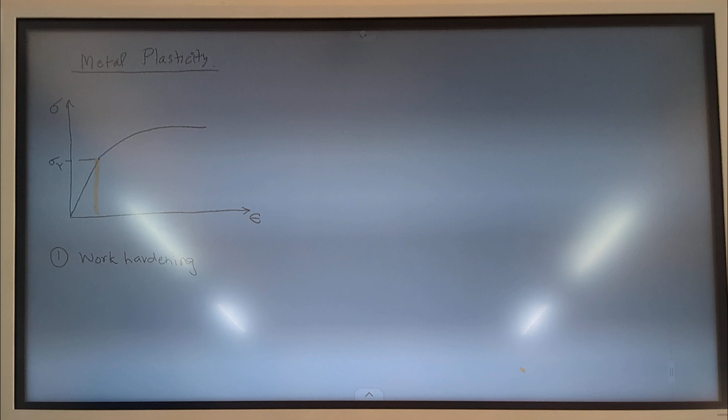So can you think of some applications where you want permanent deformation, as needed by the application? Where we don't want the material to come back after loading to its original position - we want it to become permanently deformed. So what are the applications where this is required?

You can think of many manufacturing processes which require this, which you are already studying now. Any manufacturing operation which involves drawing will involve reduction in the diameter of the wire - if you are talking about wire drawing, so various types of drawing operations.

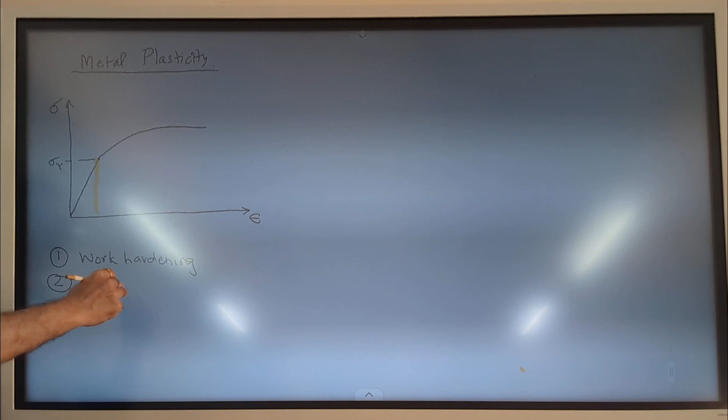What else? So I learned many manufacturing processes - hammering. Hammering is not the name of the process, that is a tool. So you can call it a forging process or bending process - that would be another process. So bending, or forming.

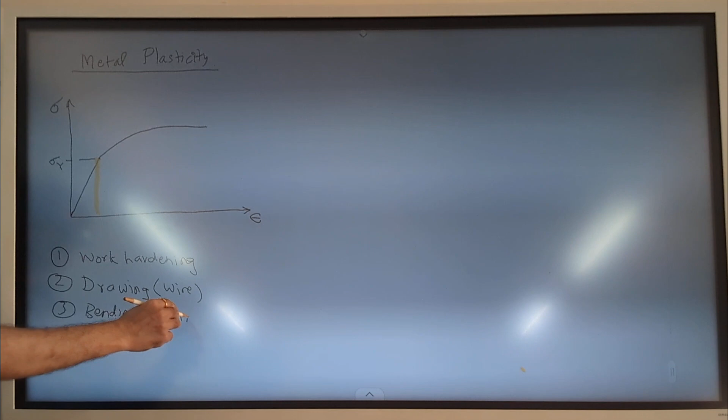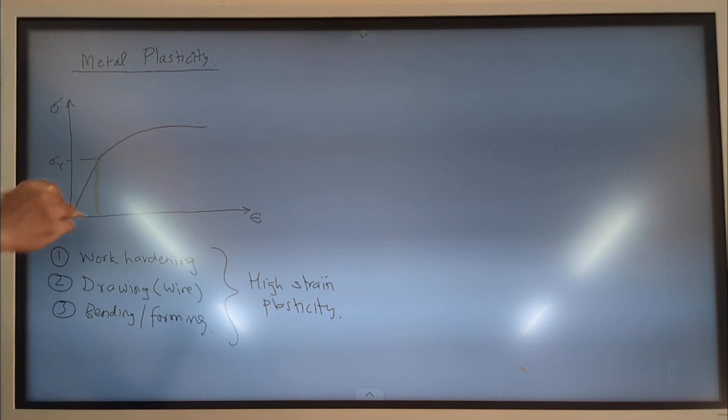These are applications where, in a rolling operation, you are making cylindrical pipes by taking a flat plate and rolling it. Those are applications where you must deform the material beyond the elastic zone. This type of application is called high strain plasticity - high strain metal plasticity, where you are operating far beyond the point where a large amount of strain is restricted. So you are not only crossing the yield zone, but going much beyond that, so the material remains permanently deformed at a large amount of deformation.

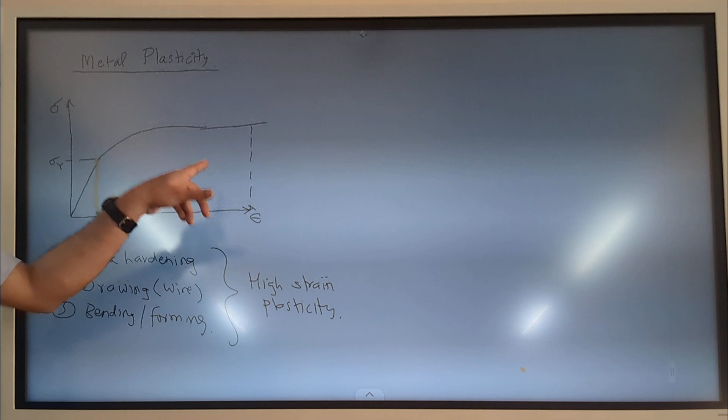So it is not a few microns of elongation that you want, but a few millimeters of elongation - that is called high strain plasticity. These applications definitely need to know what happens to the material, or how to ensure that when the material is bent, it will not crack or break. Such calculations will require the knowledge or theory of metal plasticity. Another set of applications are called low strain plasticity.

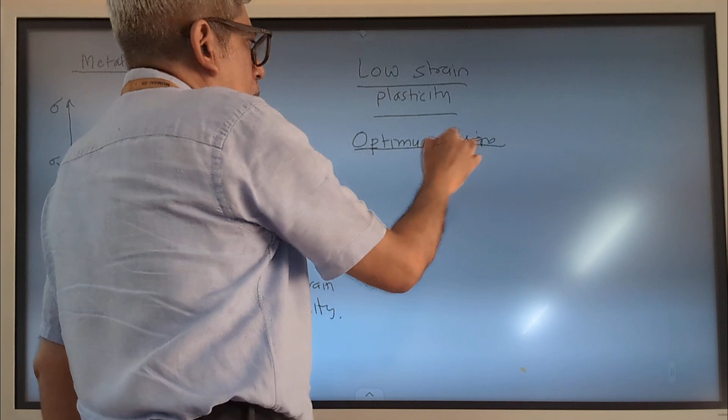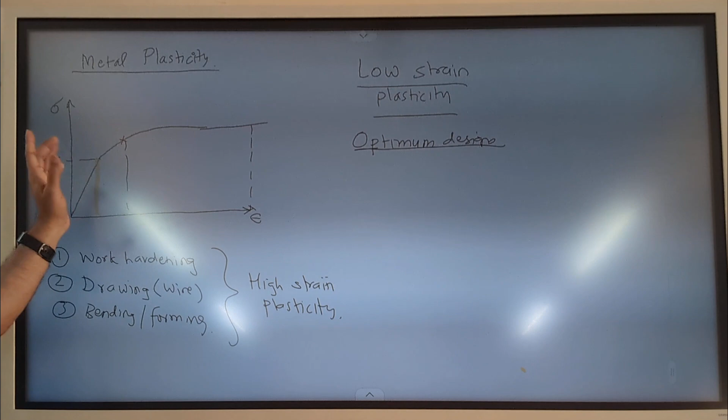They are typically used for optimum design of components, for example in aerospace industry or marine industry, where weight is a very important consideration. So you want to minimize the weight as much as possible by making the component thickness smaller and smaller. But there is a limit. If you restrict yourself up to yield strength, there is a limit up to which you can reduce the thickness, beyond which you cannot go. But if you want to reduce it further, you have to go a little beyond the yield strength, not as much as what we do here. So you cross the yield strength by a small amount and get a considerable advantage in terms of size. So these applications are mainly in aerospace or marine applications.

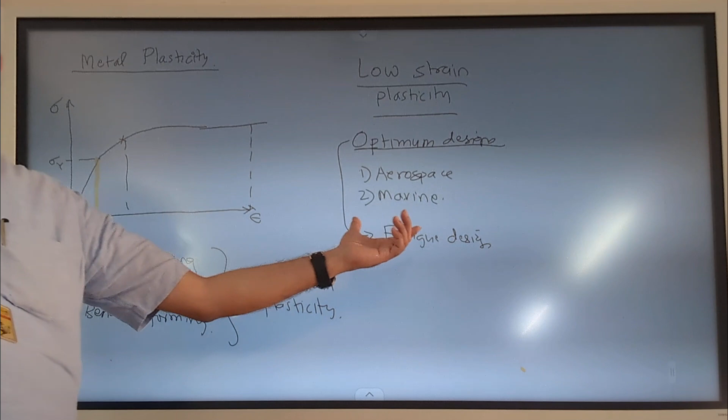This particular low strain plasticity is also very much linked to what is called fatigue design. In fatigue design, with the application of low cycle or low value strains, there is a separate theory useful for optimal design of this particular set of components. So that is the background or motivation for why we need to understand this theory of plasticity.

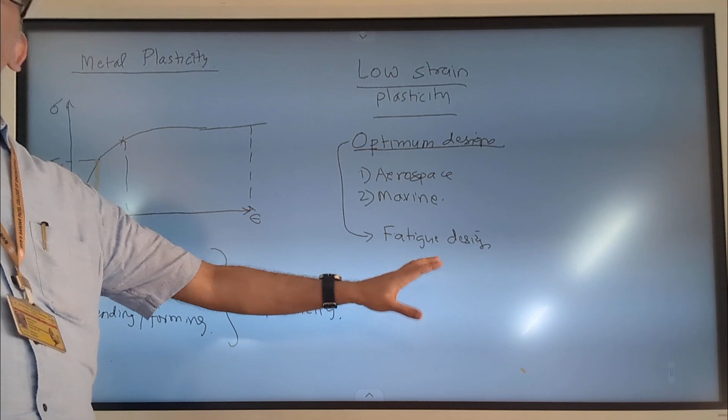Now we'll also understand some characteristics of plasticity. One thing is, as we said, that it is an irreversible process. Once the material deforms, it is permanent. You cannot get it back to the original shape. So that is an advantage and disadvantage in some applications. The second thing is it involves dissipation of energy.

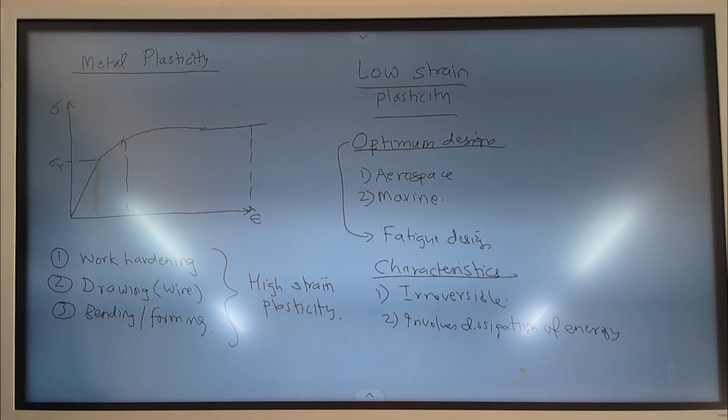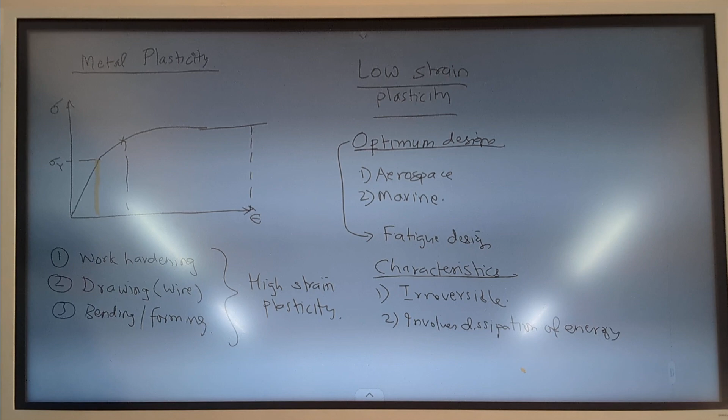I don't know whether your batch has done a physical tensile test, or whether you did it virtually. Immediately after the tensile test, if you touch the specimen, you will find that it has become hot, because while doing this plastic deformation, a lot of internal or metallurgical structures have some internal friction that has to be overcome, and a lot of work is being done internally. So part of that gets released as heat, which is why you find a temperature rise. So it involves dissipation of energy. Not all the work done during deformation gets stored as plastic work; part of it gets dissipated as heat energy. So that is another aspect.

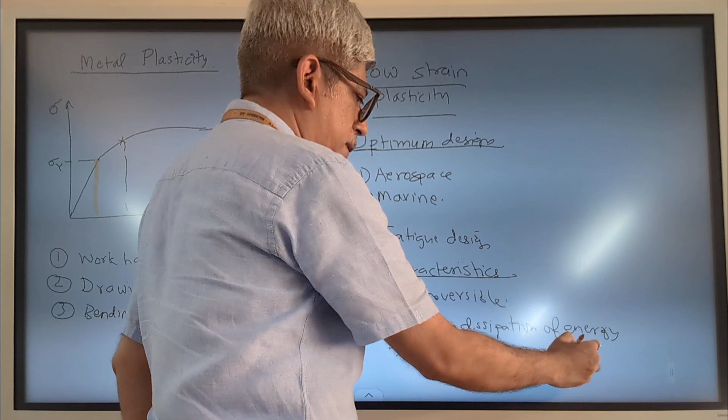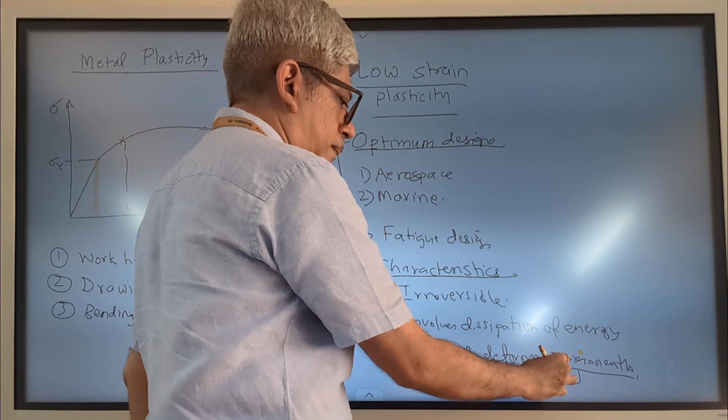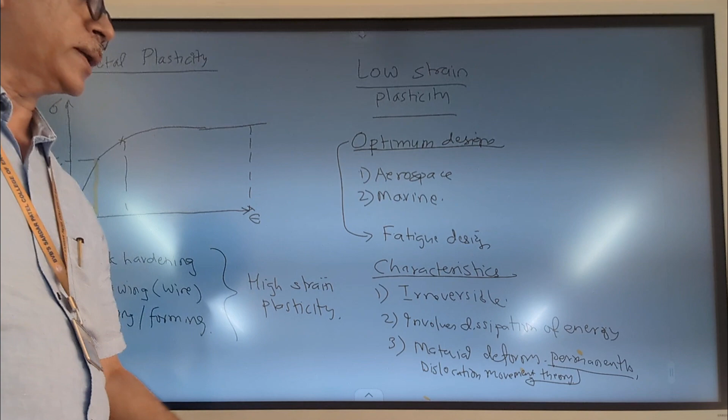One more characteristic of plastic analysis is that during this operation, the material deforms permanently, same as the first point, and you cannot get it back. This permanent deformation is explained in terms of the metallurgical processes you learn in material science. There is dislocation theory, or dislocation movement theory, which explains why the material behaves the way it does. Certain materials behave in the manner shown here. So if you want to know the physics behind how material plasticity operates, you have to take help of the material science approach, where you learn how the internal grain structure or crystal structure deforms, which leads to dislocation movement, and the permanent deformation happens because of that. So that is the background about the plasticity process.

Now we'll understand some of the terms and phenomena which are associated with metal plasticity.

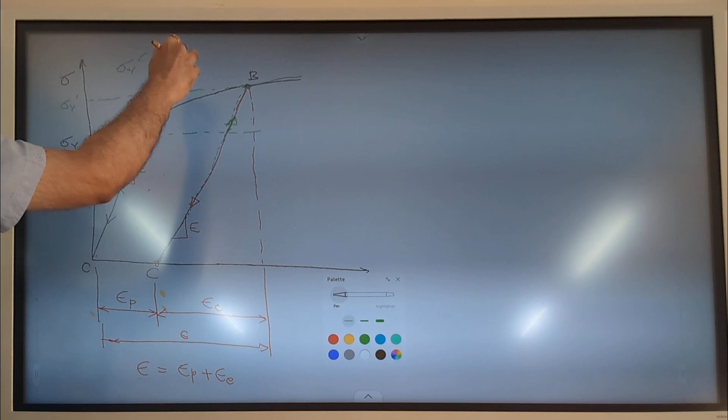So the yield point, originally sigma y, because of the one load and unload cycle, got enhanced. This new sigma y dash is greater than the original sigma y. A material which was never loaded, once it undergoes one load cycle beyond the yield strength, will show enhanced yield strength in subsequent cycles. This effect is called strain hardening or work hardening.

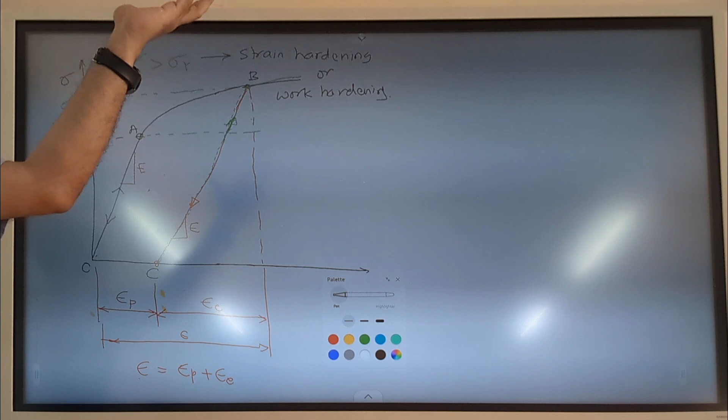So this, the definition or the process of strain hardening is that you take a component, load it beyond yield point, and again bring it back to zero load condition. In the next cycle of loading, you will find that because it has gone beyond the yield strength, its yield strength would have increased. And since in design calculations we use the yield strength as a basic property...

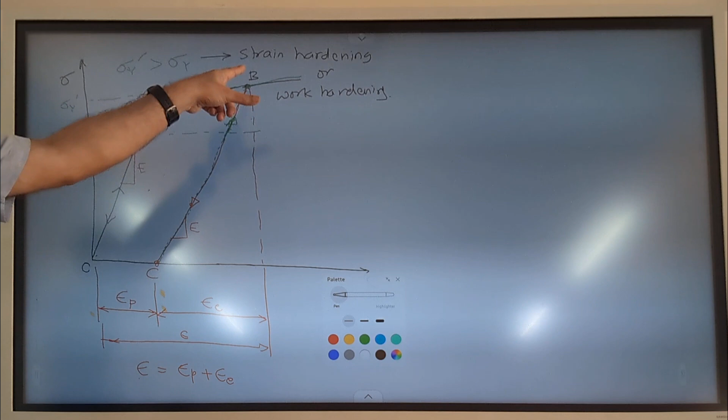If you want to use higher yield strength, suppose you order some material and it comes with 250 MPa, but for your design calculation you require 275 MPa. So one trick you can do, if possible, is uniformly stretch that material beyond the yield point, up to 275 MPa, unload it, and then next time you load it, you will find that till 275 MPa it will not yield at all. It will behave elastically till this higher value of the yield point. So this is a very useful trick or solution for many problems where you want to quickly increase the yield strength.

However, for the most common materials, which includes steel, a very popular material for us mechanical engineers, there is something odd that happens when you undergo strain hardening. That effect is called the Bauschinger effect.

Have you studied this in your material science? Work hardening, at least you must have been exposed either in material science or manufacturing. Have you heard this term, strain hardening or work hardening? Okay, so which course? Strength of materials. Okay, okay, that is okay, that is another subject where you can learn this.

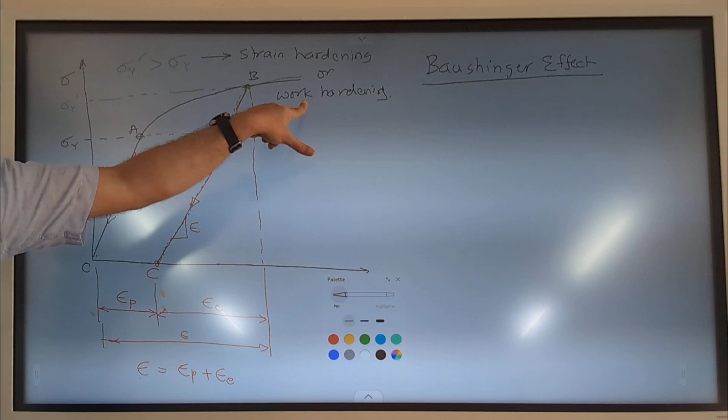So this is called work hardening. But this work hardening or strain hardening, which is advantageous, comes at some price, and that is explained by what is considered the Bauschinger effect. I don't think you might have come across the Bauschinger effect earlier. So what does the Bauschinger effect decide? This is not applicable for all materials, but only for certain materials,

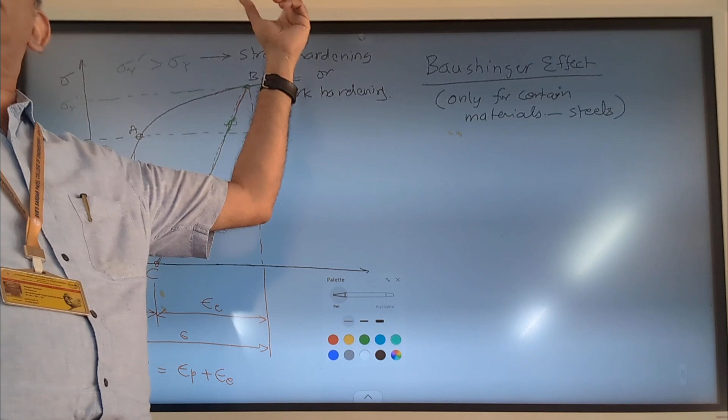which includes steel. So in this case, the Bauschinger effect shows what price you are paying for increasing the strength by doing work hardening. If you consider a material, this is the strain axis and this is the stress axis, and I am considering the material to have the same yield strength in tension and in compression. Let me call it sigma yc and sigma yt.

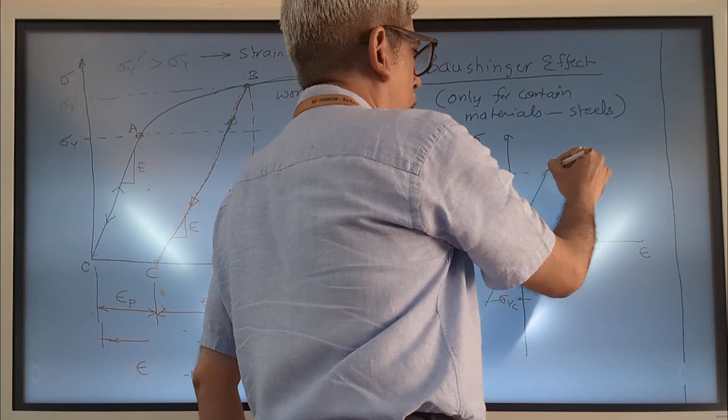So that means if I load the material within the elastic limit, between sigma yt and sigma yc, it will follow a straight line, which is the elastic behavior of the material. But if I go beyond the yield strength, if I load it beyond this point and then unload, as we have seen, it will follow this particular path where it comes to zero stress, and from here onward, if you again start loading it, you will find that the yield strength would have increased. So that is the strain hardening effect we have seen.

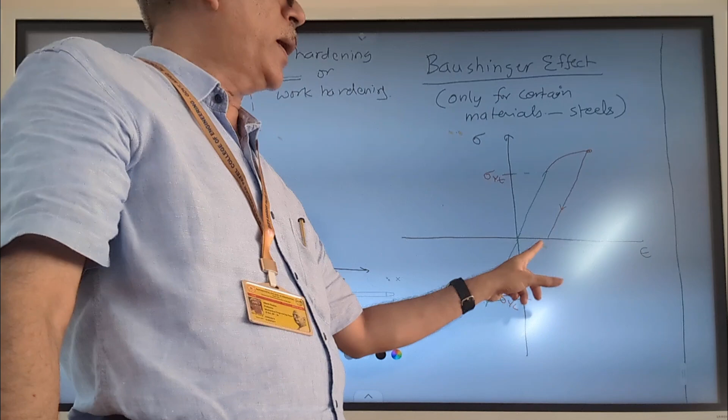But what happens if you cycle it not in the tensile direction but in the compression direction is something interesting to observe. If you start loading the component, which has undergone one tensile cycle, into a new compression cycle, what you expect is that this particular path should come up to the yield strength, or considering strain hardening, you may imagine it may go beyond this point and then yield. That is the expectation.

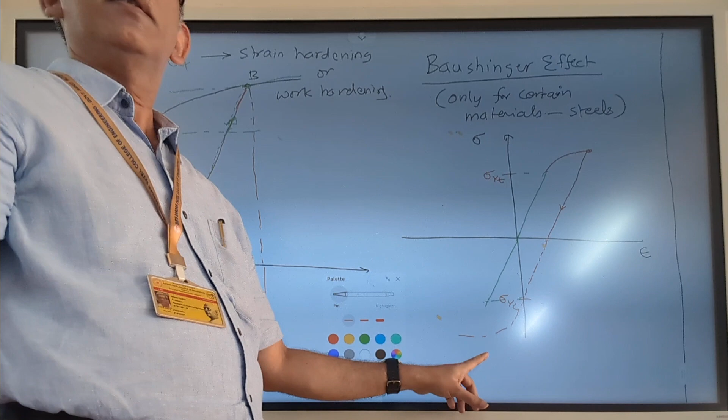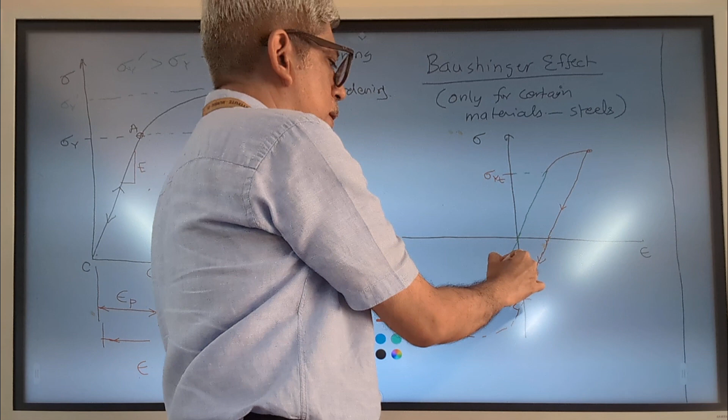But it is observed that for many engineering materials, with an increase in tensile yield strength, there is a corresponding decrease in the compressive yield strength. So this particular material, if you are loading it in the negative direction, you will find that its yield strength in compression doesn't remain the same, it doesn't increase, but in fact decreases. So it will start yielding earlier: sigma yc dash is smaller than sigma yc, where sigma yc dash is the compressive yield strength obtained after the material has undergone work hardening in the tensile direction.

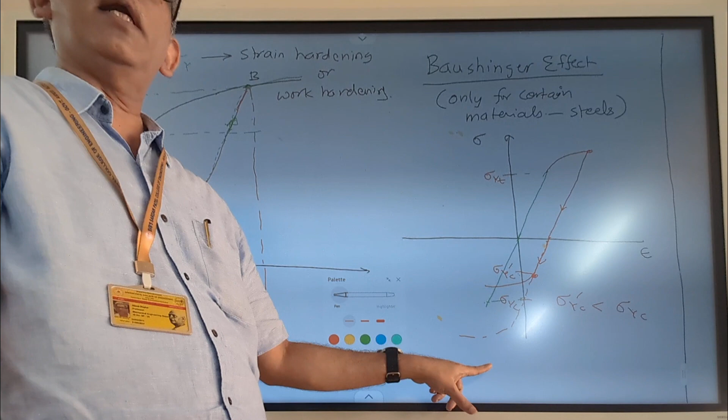This particular effect, where an increase in elastic limit in the tension direction causes a decrease in the yield or elastic limit in the compression direction, is called the Bauschinger effect. It essentially means that if you increase the elastic limit in tension, you pay the price in terms of decreasing the yield strength in the compressive or negative direction. And the reverse also holds true: if you strain harden in the compressive direction, by first loading the component in compression beyond the yield point, you will find its compressive yield strength increases, but the tensile yield strength, because of the Bauschinger effect, will decrease. There are theories to explain why this happens for certain materials, but that is beyond the scope of this course.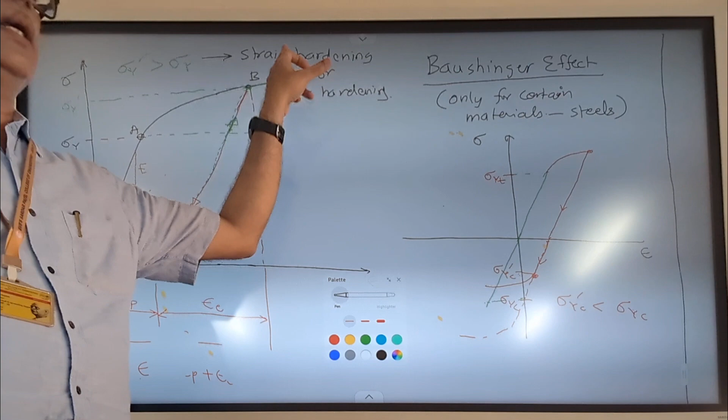But the point to be remembered is that as long as you are using work hardening to increase the strength of the material and you are remaining in the tension zone, so you are never going into compression, this is beneficial. But if you are going into a tension-compression type of application where the component undergoes both tension and compression, so for example you have a plate which undergoes bending in one direction, bending in another direction, so the top fiber will undergo compression on one side, and tension on one side and compression on the other side,

the top surface. So in such a case, the Bauschinger effect comes into the picture, where in one cycle, on the tension cycle, you will get higher yield strength, but on the other cycle, you have to consider the decrease in the yield strength of the material. So that is the point to be noted.

So any question till this point? Have you understood what the Bauschinger effect is? Can somebody tell in simple words what the Bauschinger effect is? So starting, if you load in the tensile direction beyond yield strength, the elastic limit and yield strength increases. That is the one part.

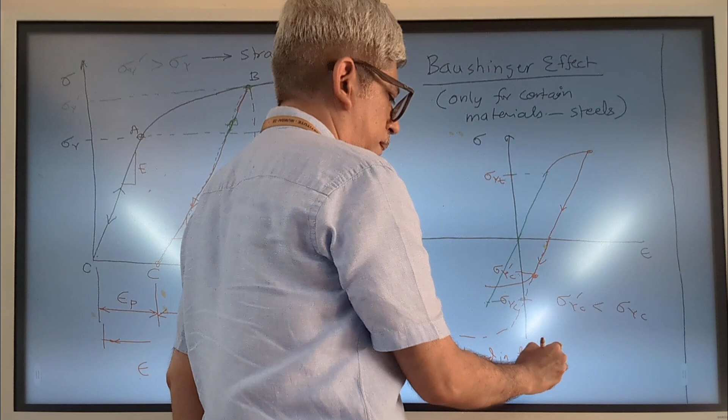Load in tensile direction beyond yield, it increases the tensile elastic limit. So this is the first part of the Bauschinger effect definition. Can you complete the second part? If you load in tension, its elastic limit in the tensile direction increases. However, what will be the next sentence?

Its subsequent elastic limit in the compression direction decreases. So after this, if you go in the compression direction, it decreases. Or if it is initially compressive, then the tensile will decrease. So that is the Bauschinger effect. Okay, any question till this point?

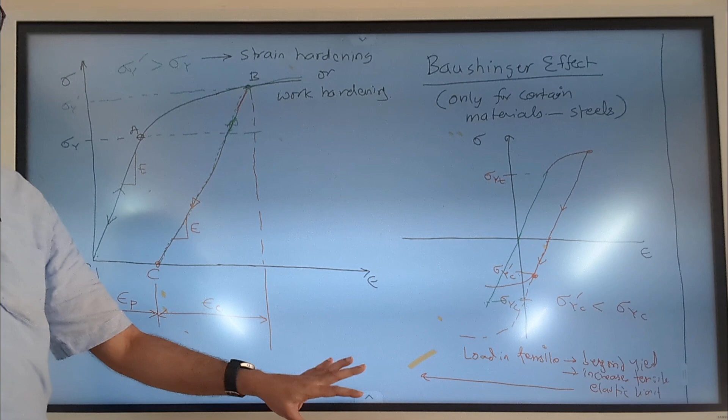Okay, so all this material plasticity depends on the definition of yield strength. So we have obtained this stress-strain diagram based on a tensile specimen which is uniaxially loaded. So it is easier to predict when the yield of that particular material will happen. But in real life, you don't deal with only bars and beams which are uniaxially loaded. You have more complicated loading. So in an actual case, you will have some component which is loaded in more complex conditions.

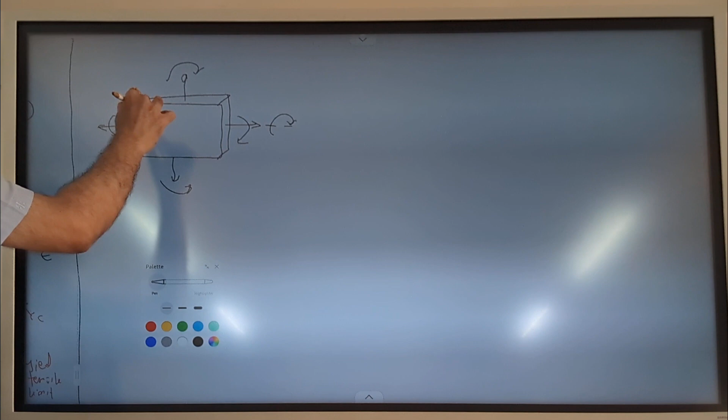So you have some component which is subjected to axial load, subjected to bending moment about 2 axes, and it is subjected to torsion as well, for example. So in this case, at any point of this body, you will have the stress state which is defined by the stress tensor. So we will have the 6 stress components: sigma x, sigma y, sigma z, tau xy, tau yz, and tau xz. So that is the stress state at this particular point.

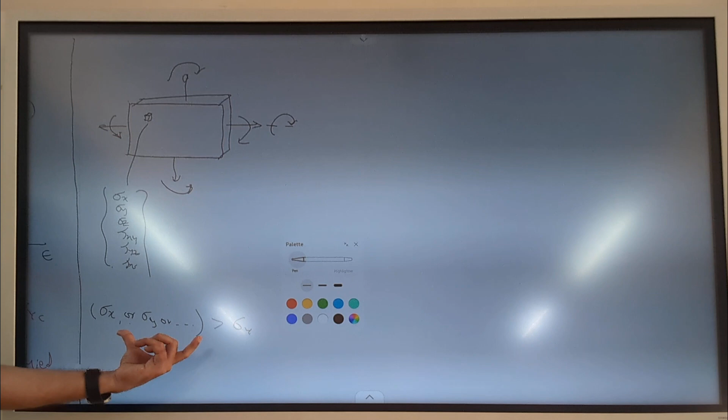Now, how do you define whether this point is going to yield or not? That is the question that we have to solve. Do you remember any solution that we use for this situation? We want to decide whether at this point the material is going to yield or not. So can you say that it's sigma x or sigma y and so on? If any of them increases beyond yield, then the material yields. Can this be an acceptable theory? It is difficult to say based only on the magnitude of an individual stress component whether yielding will happen or not.

So we use another approach. We convert these stress components into other numbers which we use for comparison purposes. So we talked about some theories of failure. We have learned only a single theory of failure. Which is that theory of failure? In the pressure cylinders, for the failure we use the maximum principal stress theory.

From these components, we can calculate the three principal stresses. And as per the maximum principal stress theory, when the maximum of sigma 1, sigma 2 or sigma 3 exceeds the allowable, then the material fails. That is what we are talking about here. So instead of the allowable, if we use some value which corresponds to the yield strength, if we say that if any of these principal stresses exceeds the yield strength, then the material will yield.

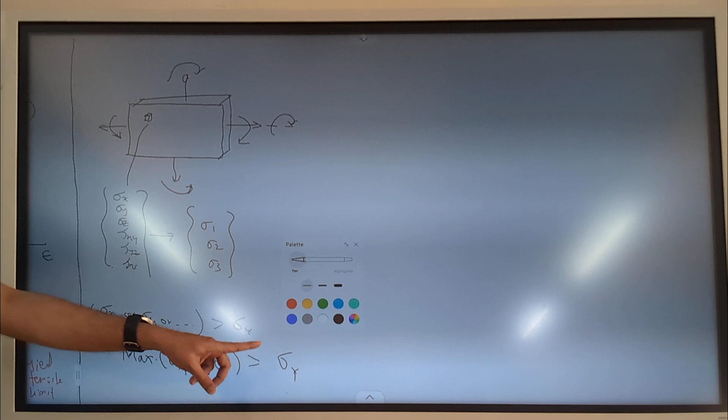So that is a hypothesis. I am not saying that is the correct thing to say, but as per this maximum principal stress criterion, the prediction of yield at this point would be done as follows: if the maximum principal stress at this point crosses the yield strength, then this point will be considered as yielded. So such hypotheses or criteria are called yield criteria.

There are multiple yield criteria. That means for different materials, different yield criteria are prescribed. The simplest one, and for each failure theory, there is a corresponding yield criteria. So the first theory, the simplest one, is the maximum principal stress theory, also called the Rankine theory.

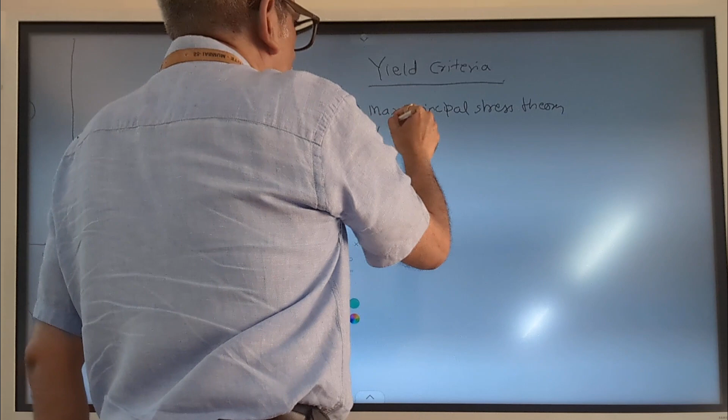We say that yield will happen when the maximum of sigma 1, sigma 2, or sigma 3 exceeds the yield strength. So this approach, the left hand side, is called the yield function.

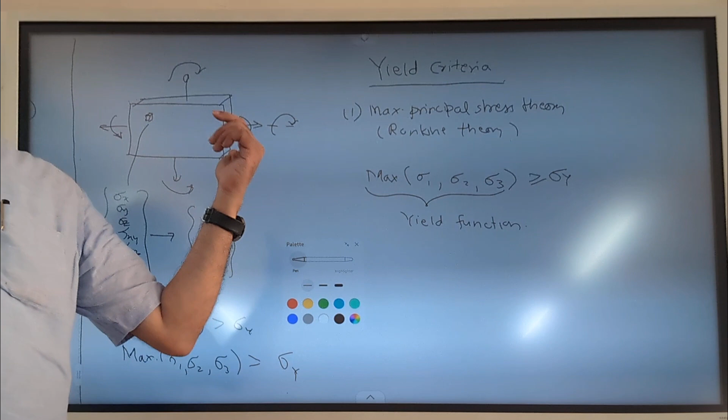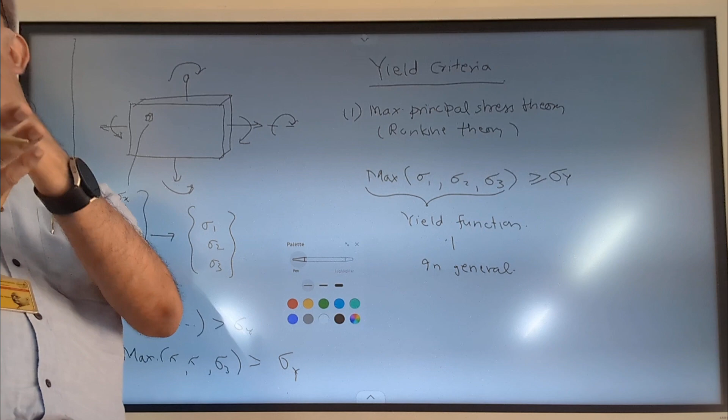When dealing with metal plasticity, you will find there are different yield criteria, and corresponding to each criteria there will be a different yield function. In order to determine whether the material has gone into the plastic zone, that is the first premise based on which further theories will be established. So first we have to decide whether this point has undergone yielding. How do we decide that?

There are different criteria. One of them could be the maximum principal stress theory. In this criteria you calculate whichever is the maximum principal stress. If it has exceeded the yield strength, then we call that this particular point has yielded, and then you apply the further theories present in plasticity.

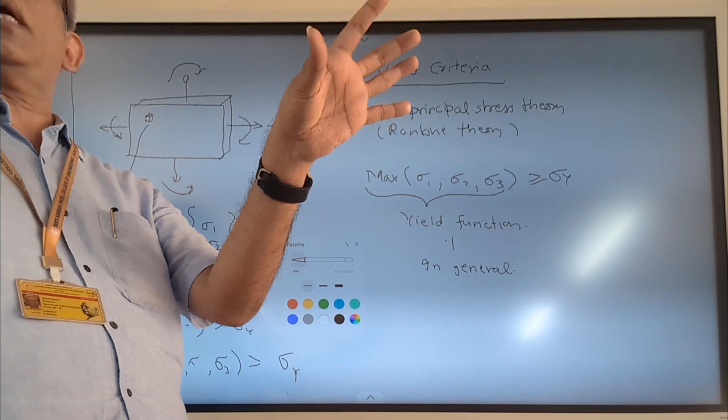So the first step in plastic analysis is to establish which region of your component has crossed the elastic limit and entered the plastic limit. For example, if I apply some load on this table, how much region has undergone plastic deformation can be established by calculating the contour of maximum principal stress. Whichever zone has maximum principal stress beyond yield strength, that much zone we call as gone into the plastic zone. In general, this can be written as a function of sigma 1, sigma 2, sigma 3.

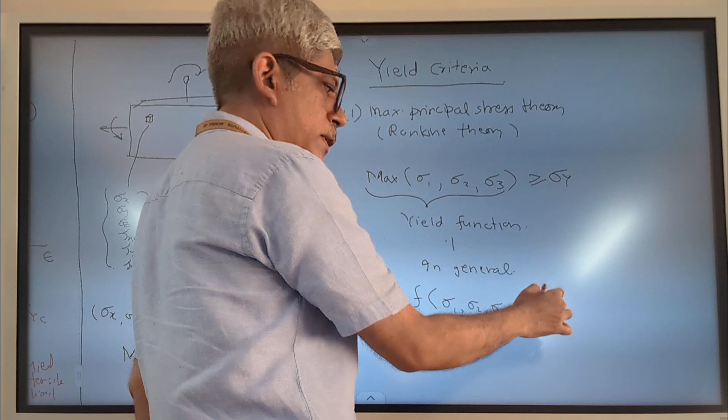There are other components which, for simplicity, we will not consider, including the effect of work hardening and other things which we'll ignore at this point. So this equals C, where C is some material constant. This is called the yield criteria in general.

For example, max of sigma 1, sigma 2, sigma 3 is one of the yield functions. When it becomes sigma y, where C has taken the value sigma y, we will say that the material has yielded. So that is one of the criteria.

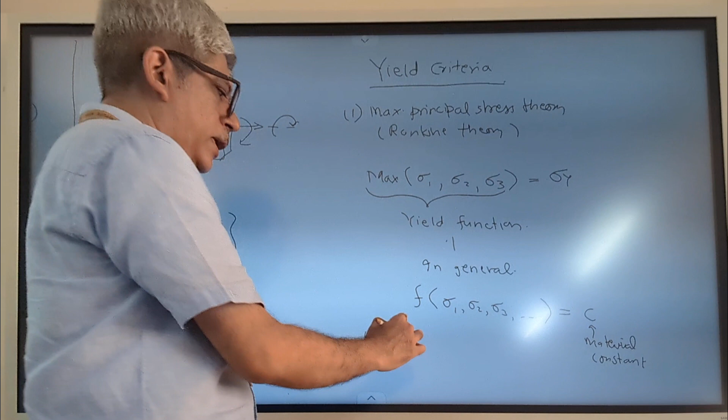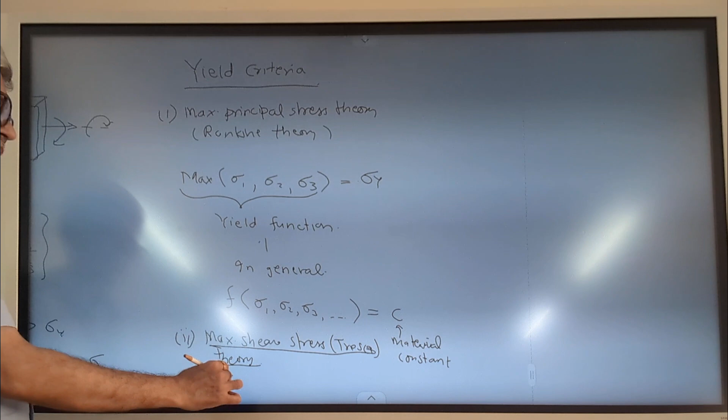The second common failure theory is the maximum shear stress theory. It is also called the Tresca theory. In this particular theory, the function is the maximum of sigma 1 minus sigma 2 by 2.

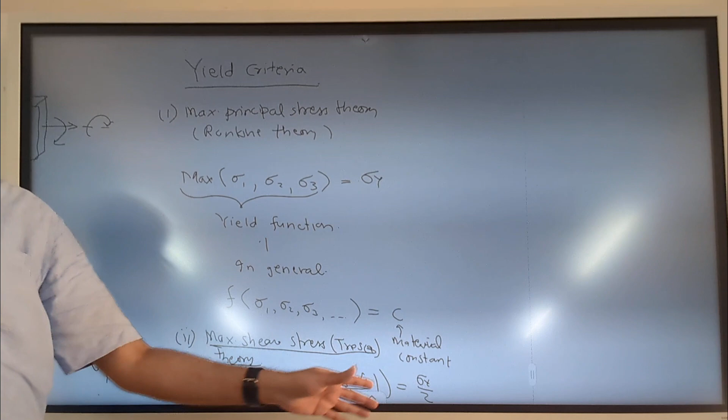As per this theory, yielding is said to have happened when the absolute difference between any two pairs of the principal stresses, that is sigma 1 minus sigma 2 by 2, and the mod of that, the unsigned value, whichever is maximum, when it crosses yield by 2, is called the Tresca yield criteria. The corresponding theory is the Tresca failure theory, in which instead of yield strength you can put the allowable stress. What we are looking at here is the Tresca yield criterion. So as per this criterion, whenever this condition is met, the material is supposed to have undergone yielding.

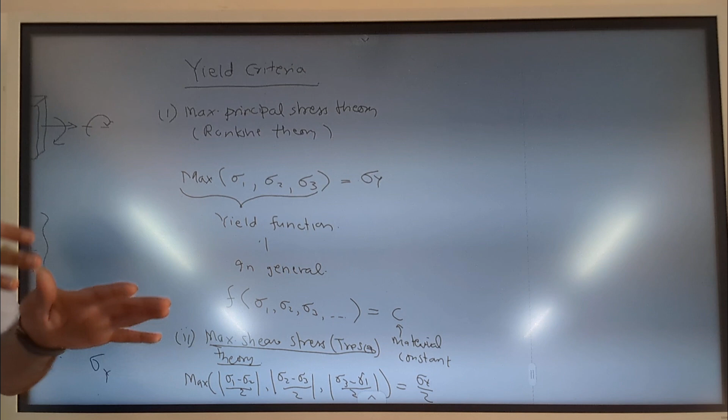So the initiation of yielding is shown here. There are multiple models—if you open any finite element software, for example ANSYS, you will find different material models being presented, and in that model you have to choose the yield criteria. There is the Tresca criteria, the von Mises criteria, the Drucker-Prager criteria, and so on. For different materials, different yield criteria will be used. Knowledge of this is required before you do plastic analysis, to select which material model or yield criteria to use. This will give you some exposure to what yield criteria is, so that when you read documentation you can make out the meaning of the material model you are going to select.

Now based on this yield criterion, whenever you are doing analysis using it, one generally doesn't use the actual stress strain curve. For calculation purposes you will have to use the stress strain curve.

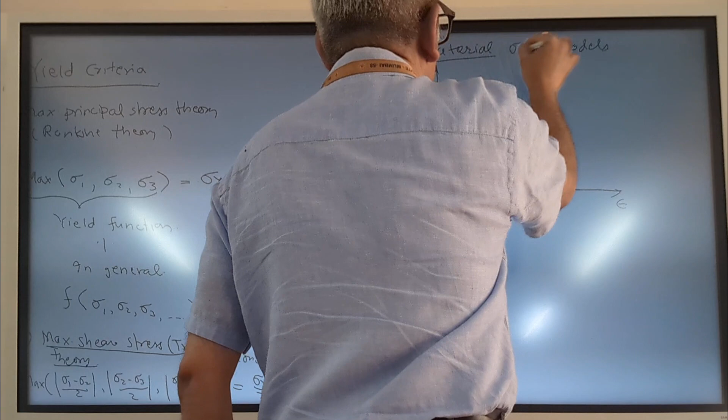So one aspect of plasticity is how you decide whether the material has undergone plasticity or not—that is the yield criteria. The other aspect is, once the material has yielded, in order to do the analysis you have to use some model which tells you how the material behaves after the yield strength. The accurate way of doing that is to provide actual stress strain data, and the material will behave as per this condition. That is the actual material model.

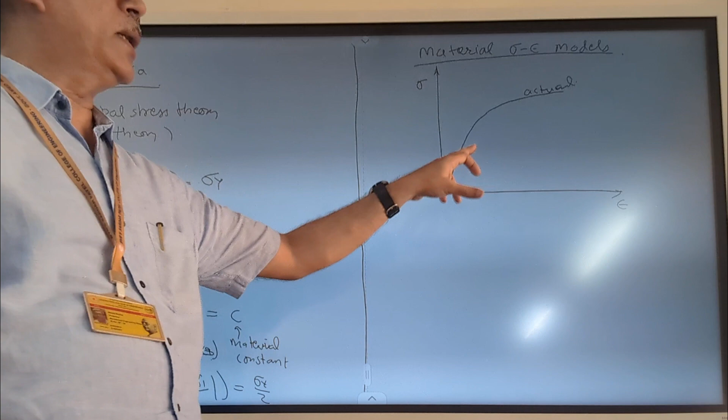However, when one uses this particular approach, you have to supply the data of the material stress strain curve to your numerical method, maybe finite element method or any other mathematical model that you are using. It becomes computationally very expensive to use the actual stress strain data. So some simplification is done.

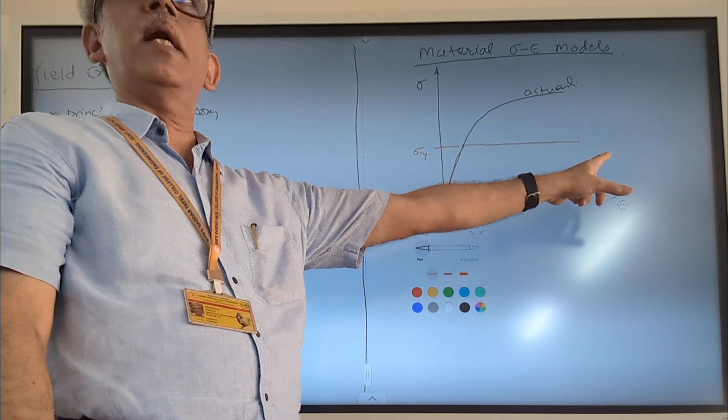One common simplification done for preliminary analysis is called the elastic perfectly plastic model. In this model, up to the elastic limit, whatever is the yield strength, you consider the actual stress strain curve, and beyond that, you don't consider the hardening effect, but consider the material to remain straight, or it simply flows beyond the yield strength. The stress can never exceed the yield strength. So this is called the linear elastic perfectly plastic model, which is commonly used for the first iteration, or just to understand how the component is going to respond beyond yield load.

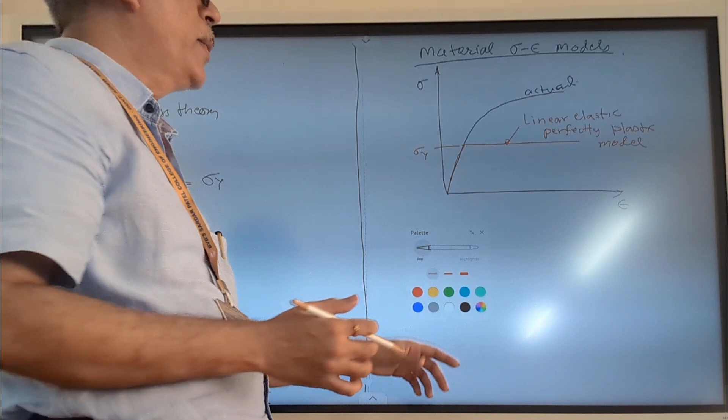This particular criteria would be used. For more accurate estimation, one uses what is called the bilinear model. Here, up to the yield point, the behavior is the same, but after this, one considers another straight line, which has a slope that is maybe an average of whatever behavior occurs later. So that is called the bilinear model.

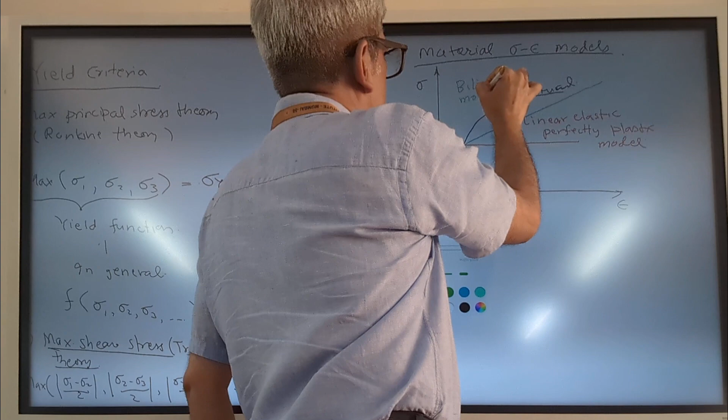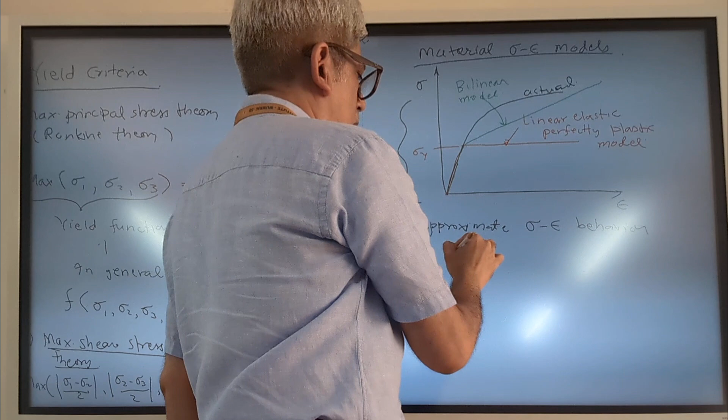And there are other models which include some exponential curve beyond the yield point and so on. We'll restrict the discussion here only to these two models. So these are the two models used for approximating the stress strain behavior, in order to reduce the computational load.

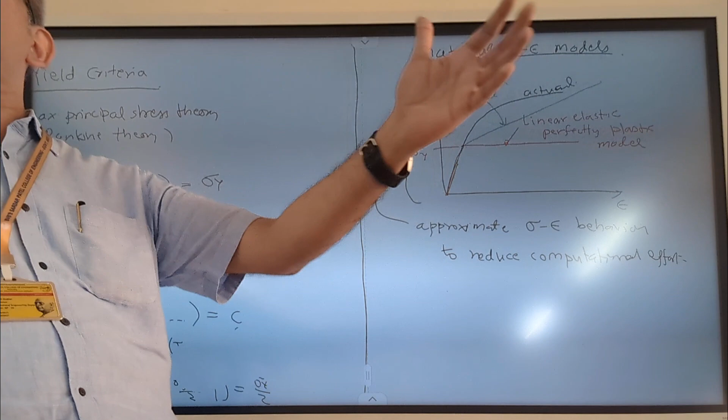With computational power increasing so exponentially, the use of this model seems to be not so relevant. However, for a quick guess, even for the most powerful computer today to do a proper plastic analysis, for example a car crash analysis, one requires several hours to run that analysis if you use the actual stress strain model. In such a case, to get a first feel of what is going to happen, one usually adopts the elastic perfectly plastic model. This allows you to do calculations in a much simpler manner, and also using this model one can develop an analytical, equation-based approach, which is not possible for data-driven models such as actual experimental data.

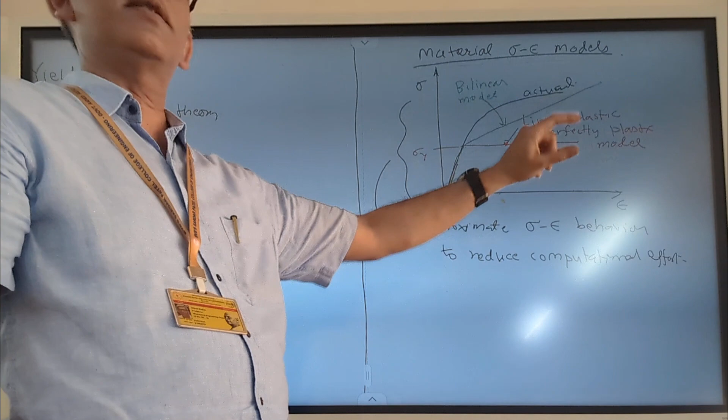That is another subcomponent of plastic analysis. Whenever one is designing the plastic analysis, it is almost always that one adopts some kind of numerical method, and there one has to use the stress strain model as defined here. In order to define what is sigma y, you require a criteria which is as given here.

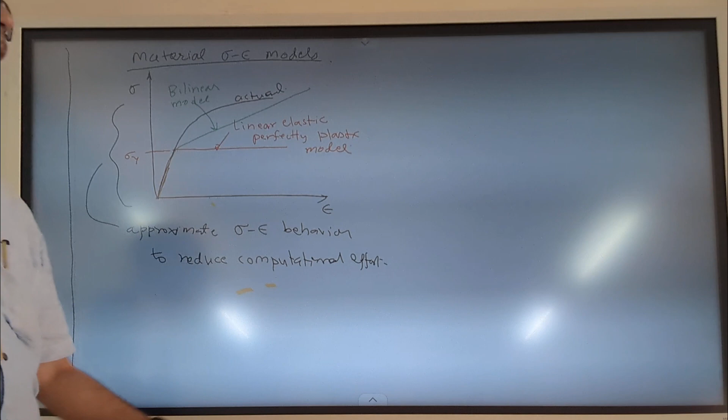So that is about the stress strain model, and we'll look into what is called the visual representation of these models. There is a typical representation in which the different models are graphically represented so that you can compare the behavior of the material in different situations.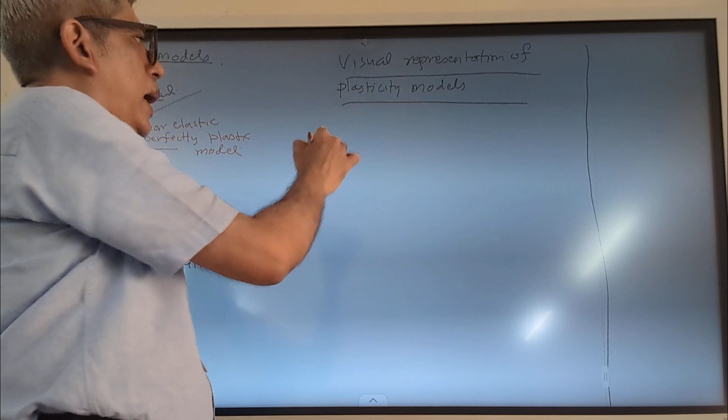The representation is done such that if you want to represent how the yielding happens, you would consider a three-dimensional space where the three axes correspond to the three principal axes. Sigma 1, sigma 2, sigma 3 are the three principal directions along which you orient your coordinate system. Then you say that a point in space, for this particular component, has value sigma 1 star, sigma 2 star, and sigma 3 star. And we know that based on one of the yield criteria, this particular point lies on the yield surface.

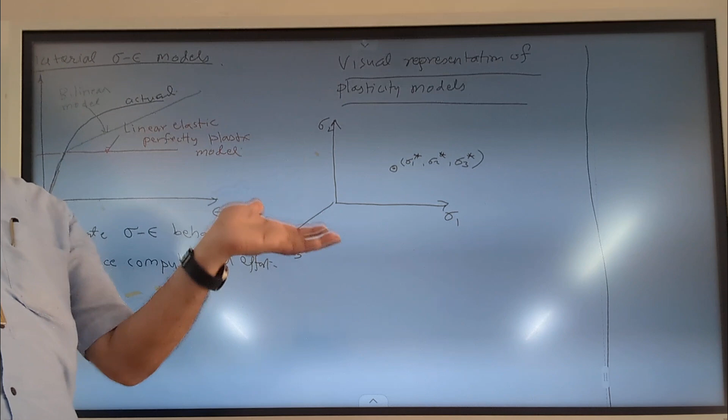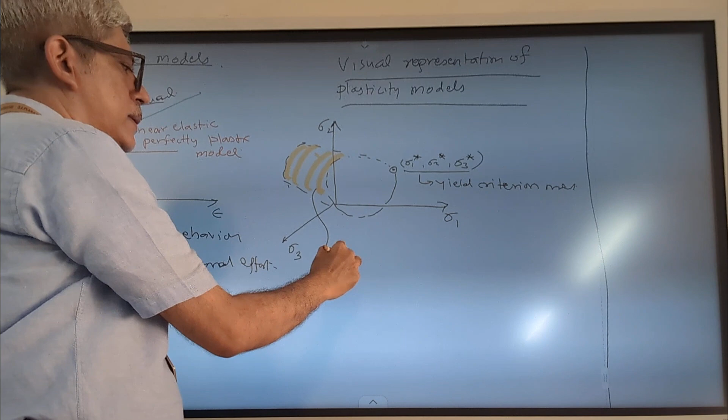Yield surface in the sense that it meets the criteria perfectly. This yield function corresponds to the value equal to the yield strength or whatever material constant we are considering. If we join all such points together, where the failure or yielding is going to occur, you get a sort of surface. All points on this surface represent that yielding is going to happen, so the yield criteria is met. If we join all such points, you get a surface. This particular surface is called the yield surface.

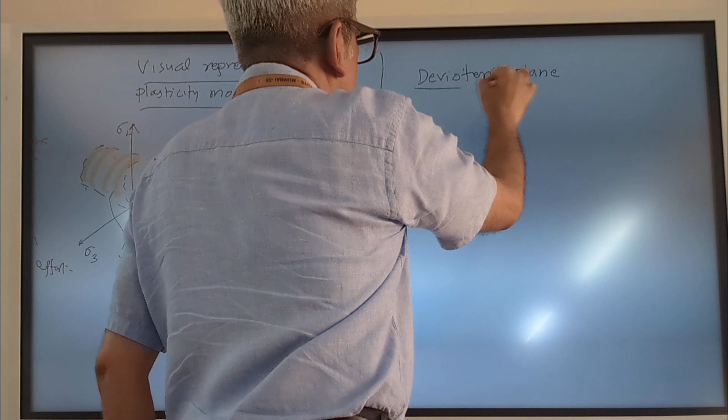However, it is difficult to represent this in 3 dimensions, or project and visualize this surface in book or paper form. So one uses what is called graphical representation on what is called the deviatoric plane. This is a plane in the sigma 1, sigma 2, sigma 3 coordinate system. In the same space where sigma 1 is aligned with the first principal stress, second and third, this particular plane has got a normal.

So if I draw normal to this plane, it has got direction cosines as 1 by root 3, 1 by root 3, and 1 by root 3. In the initial analysis, we had done a numerical problem considering a plane. So this is a plane which is equally inclined to all 3 axes, meaning it is equally inclined to sigma 1 axis, sigma 2 axis, and sigma 3 axis.

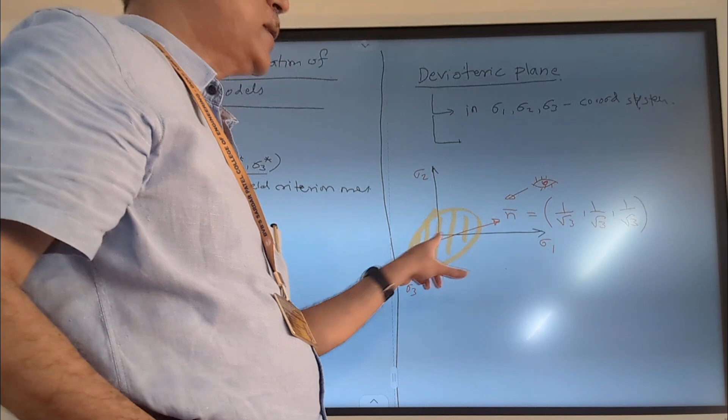And the yield surface, which is in 3 dimensions in sigma space, is projected onto this plane. So you can imagine somebody is looking from this direction, normal to this particular plane. One would observe the axes as...

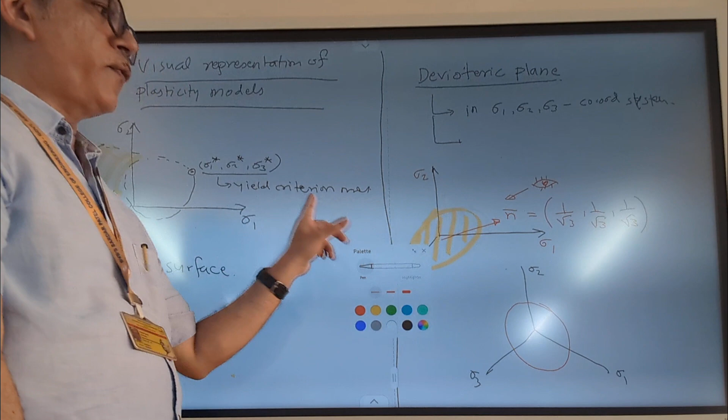For example, one of the criteria is the von Mises criteria, where the yield surface will look as a circle in this particular form. This curve is called the yield locus. And if you project this surface in 3 dimensions, that is called the yield surface, which we already discussed at this particular point.

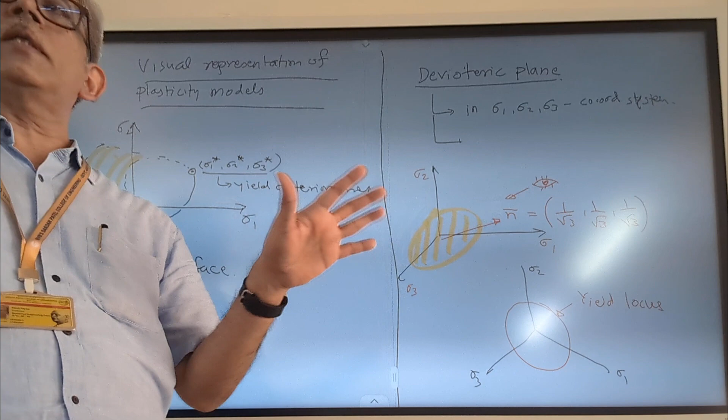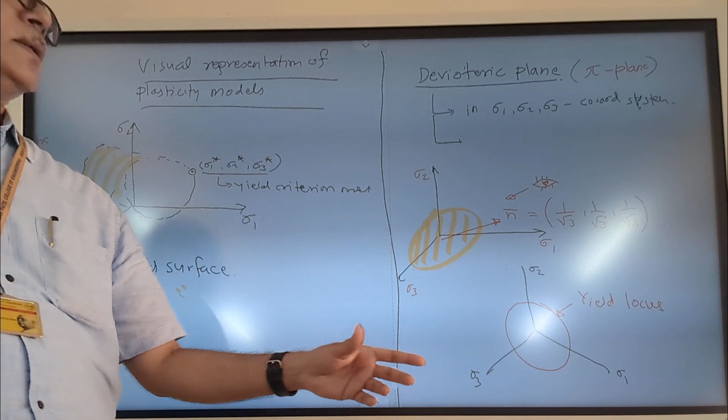So these topics are just for you to get exposure to what is involved. These are not required for calculation, that is for comparison between the 2 theories, say the Tresca criteria and von Mises criteria. One can visualize them better on a flat surface, and the chosen flat surface is called the deviatoric plane, or in the textbook it is also called the pi plane. So the pi plane is a plane which is equally inclined to the 3 principal axes. That is just exposure for you to this topic.

Then the actual analysis starts: what happens to the material when you start loading beyond the yield point and then unloading it. That is a much more complicated aspect which is not suitable for the undergraduate course.